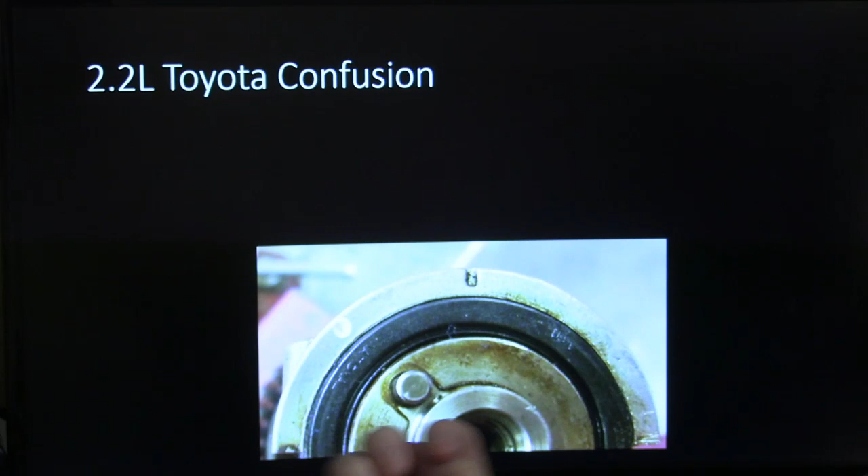One of the things I wanted to start out with, though, was something different. This was something I always thought was very interesting on these late 90s Toyota 2.2s. You see that little situation right there where you've got on this cap, there's a couple of marks. Now that one I got marked in white, and then there's this one up here. Those of you familiar with those engines are already thinking about this, and somebody may have the answer. I haven't really researched it, but you might notice this is the wrong mark to use whenever you're lining up the timing gear, the cam gear. This is the right mark. It's supposed to be here, not there.

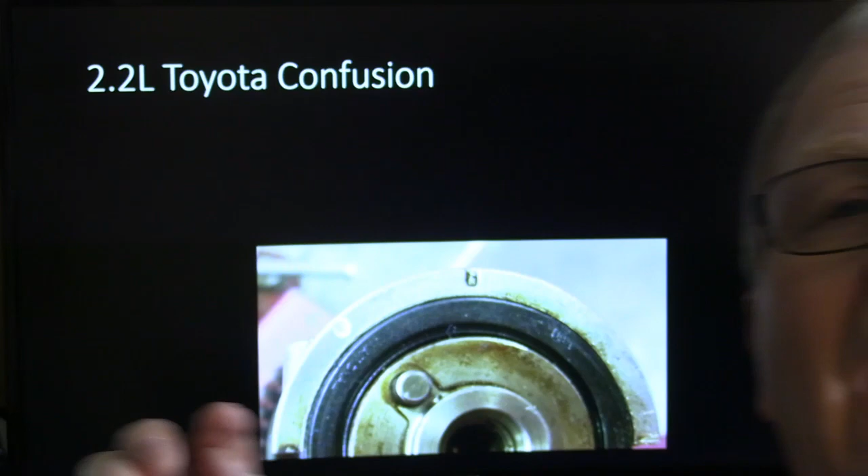Well, my question is, what's that mark doing there? Now there may be -- and this is not an interference engine, so it's not a place where you'd set the camshaft to avoid bending valves. So what I would say is, if some of you people that are really sharp on Toyotas know what this other mark is for over here, I would really like to know. Because why would it be there, where it so perfectly lines up with that hole, if you weren't supposed to use it for anything? I could be totally off base here even wondering about that.

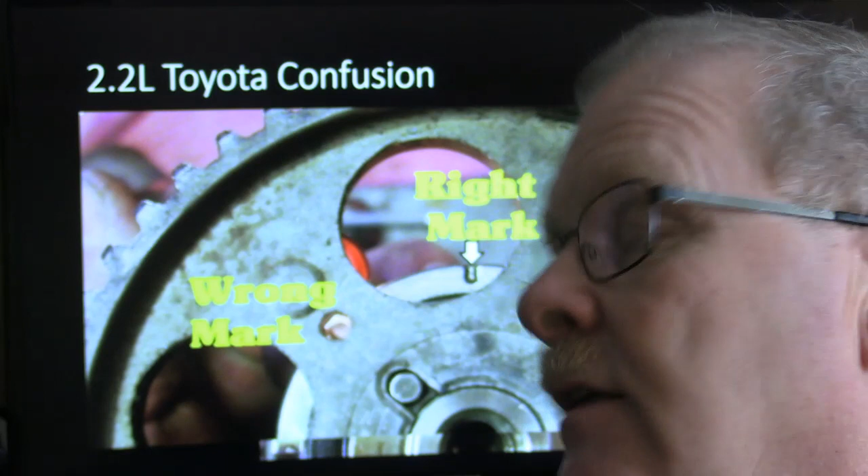But I do remember we were doing some work on an 97 Camry, and there was a Toyota mechanic that told me to line that up with that hole to set the timing, but then I realized later that this one here was the one I should have used.

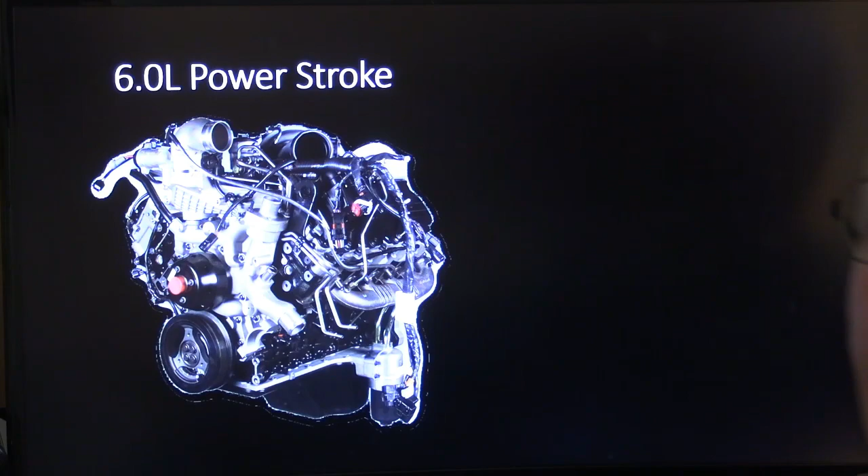Okay, now the 6-liter Power Stroke -- I had a bunch of material out there on the 7.3 Power Stroke, and a lot of you guys have some knowledge of the 7.3, which had those hydraulic electronic unit injectors, HEUI injectors, made by Caterpillar. They basically had an intensifier piston in there, and a solenoid on top with just a couple of ohms of resistance, using 115 volts. They would let high oil pressure in -- there was a control. The engine controller was able to control the oil pressure allowed to enter these injectors, and as it energized the solenoid, it would allow that oil pressure to act on top of that intensifier piston, which was 7 times bigger on top than on the bottom.

So whenever the fuel was -- let's say you had 600 pounds of pressure coming in on top, you multiply that times 7, which would be 4,200 pounds on the bottom, and the thing could go up to 3,700 pounds of high oil pressure. If you multiply that times 7, you can see the amount of fuel pressure applied to pop those injectors and allow them to spray that real fine fuel in there on the 7.3 direct injection diesels. It was a really interesting way to handle that, and it was pretty doggone reliable too.

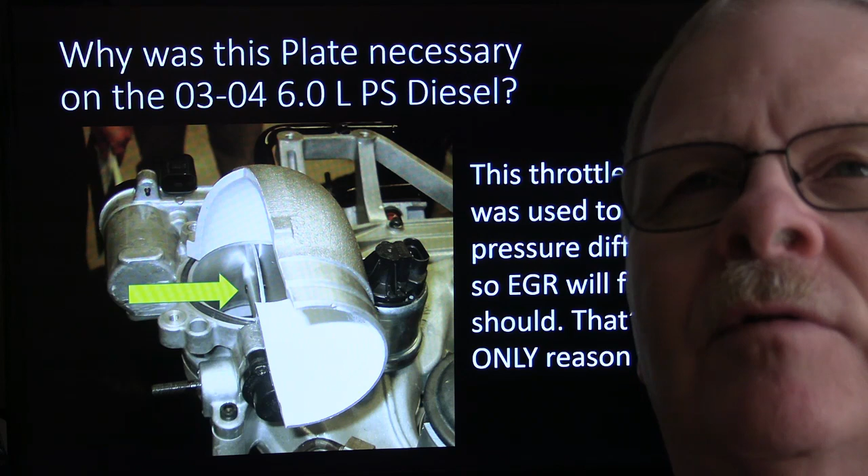Okay, so this throttle plate on the early 6-liter engines was there for the purpose of changing the pressure. So if you start to close the throttle plate a little, it enables the pressure to drop in the intake manifold and allows EGR gas -- when the EGR valve was open -- to flow, since they started being concerned about oxides of nitrogen on diesels right along in there, and they were reducing the amount that an engine would be able to legally produce as far as EPA goes.

If you close that throttle plate part of the way, you're not regulating the power of the engine with that thing. Although if it's stuck shut, it obviously would, but it didn't typically have a lot of trouble with it. That was supposed to make the EGR work. It let the EGR freely flow in there because it would lower the pressure in the manifold enough so EGR could flow. That's the reason that throttle plate was on that 6-liter.

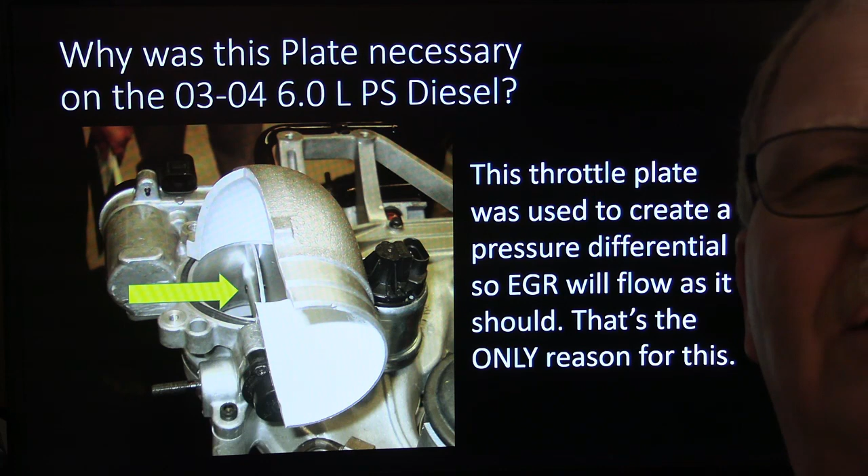I thought that was very interesting when I first saw that. This is how it was kind of wired up. In a way, it's simpler than the throttle bodies that are on the electronic throttle body vehicles now, with all the redundant potentiometers and all this kind of stuff.

This one here didn't really have the capability to let the vehicle run away. If it malfunctioned and stuck closed, it would basically choke the engine down so that it wouldn't run. So they weren't too terribly concerned about having everything so redundantly connected to this throttle body because of the nature of the job it was supposed to do.

You might notice it was very simple here. It just had a couple of wires going in there where it would drive it back and forth via these gears. Of course, there's your EGR valve right over there close by it and all that.

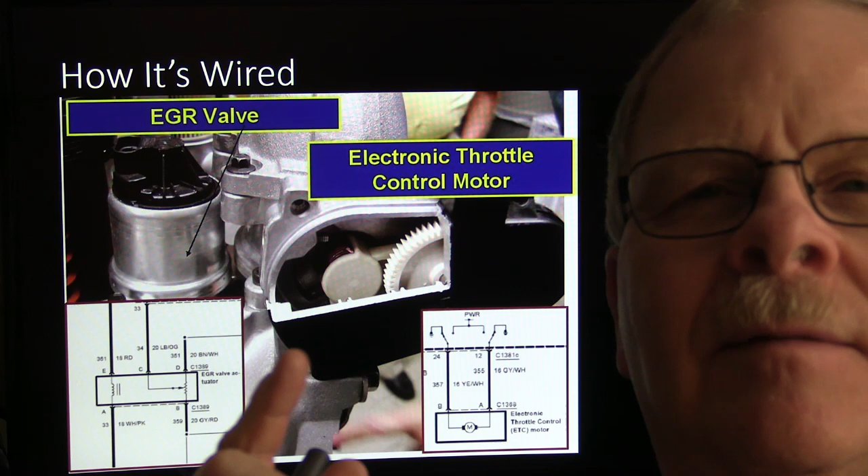But the newer throttle bodies - and I'm always speaking warnings about those - on the newer electronic throttle body vehicles, keep your hand out of the throttle body, keep your finger out, because if somebody is holding that gas open, or if you push it open with your finger and the engine's not even running, it can just destroy the throttle body on some vehicles so that you wind up having to buy a new one.

So the best thing to do is switch on the key, have somebody push the gas pedal to the floor inside the car, and it'll open the throttle plate all the way up, and you can clean it with your toothbrush if you feel like you need to, or whatever.

But if you happen to get your finger in there and your buddy takes his foot off, the spring tension is not what closes that when the key is on. It actually drives that thing closed, and it's got enough power to cut your finger off. So keep your finger out of anything you don't want cut off. It needs to be kept out of that throttle body. That's basically just a little bit of warning.

But this one here basically did a different job, so they didn't put redundant sensors all over the place on this. Even though the 7.3 had a redundant setup - it had a potentiometer and what they called an idle validation switch in there on the gas pedal.

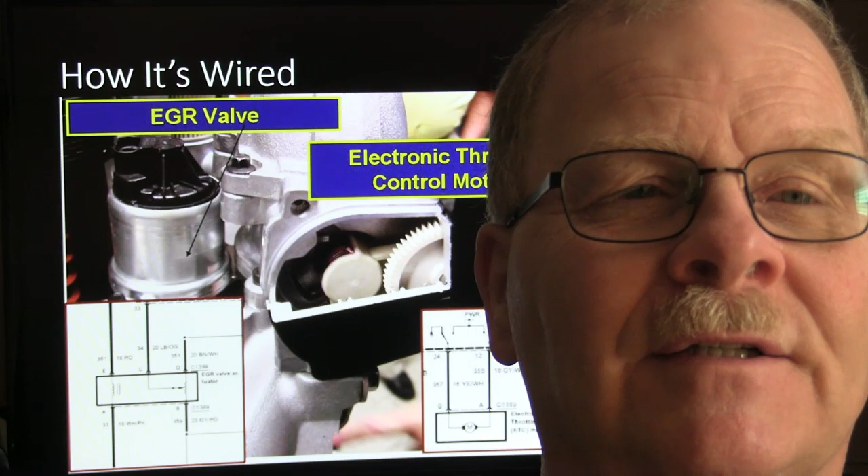Sometimes we'd have to replace those gas pedals because it was an electronic throttle, as it would change pulse width and all that kind of stuff. You could put cruise control on one of those fairly easily too, if you knew how to do it, because it was built into the engine controller on those 7.3s all the way back to like '95. Of course they came out in '94.

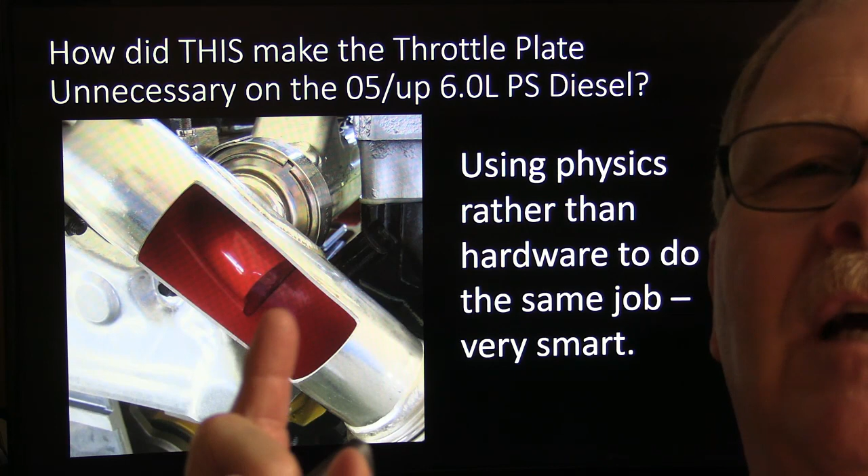But anyway, how did this make the throttle plate unnecessary on the 6-liter diesel? In '05, they used a scoop. They put a scoop in there so that when that exhaust was flowing through, it would come up to that scoop and go in there, and there was a positive pressure on that EGR, which enabled the exhaust gas recirculation to work without needing a throttle plate.

And that removed some hardware and obviously reduced the cost - the number of circuits. There were a bunch of different goodies that came about on the EGR system from them putting a scoop in there. It just made all the sense in the world when you think about it.

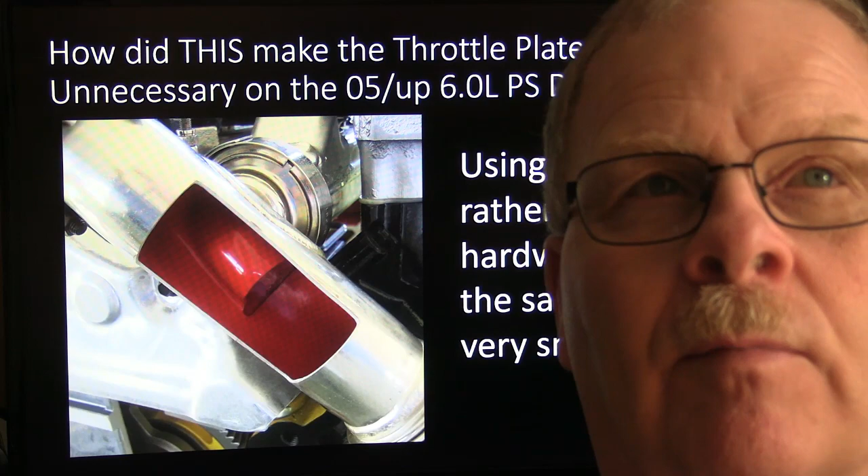Now on these cutaway engines that I'm going to be showing you little bits and pieces of: white is intake air, red is exhaust, and purple will be high fuel pressure and high oil pressure if they're on the ones that have high oil pressure, like this 6-liter driving the injectors. Pink will be fuel.

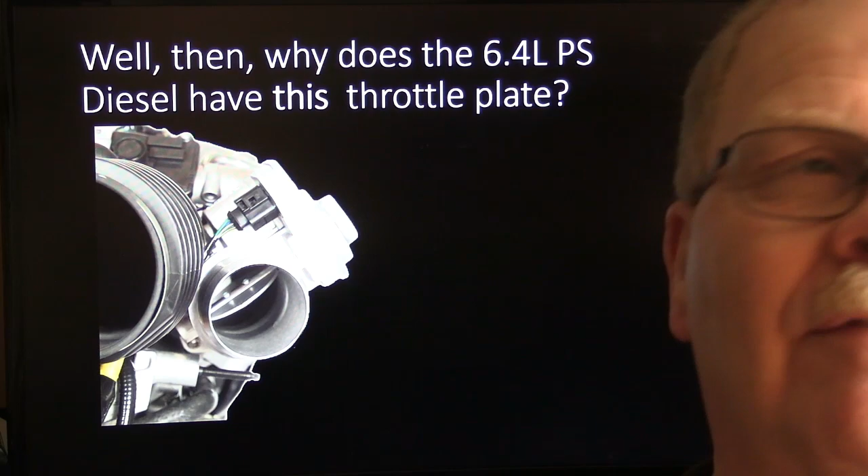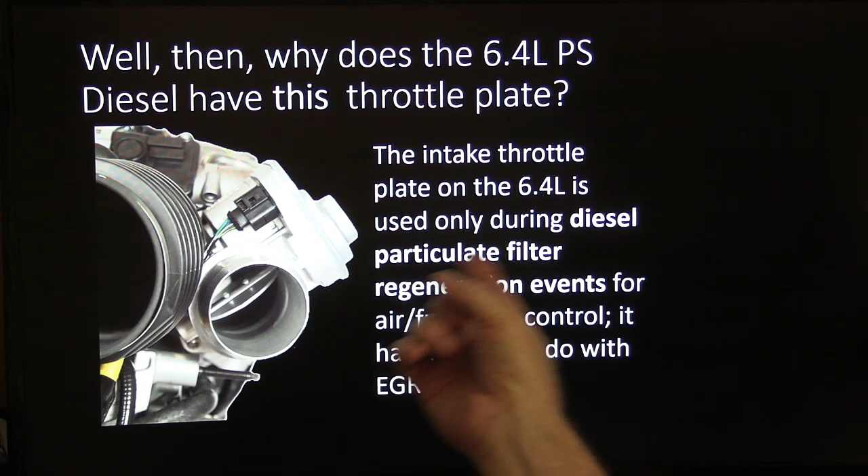All right, but why did the 6.4-liter Power Stroke diesel have this throttle plate if they had already gotten past the need for having the pressure differential for EGR? Well, the reason that one's there is to help with diesel particulate filter regeneration, which is kind of like a self-cleaning oven. If you heat that soot up hot enough, it just turns into a fine ash and goes out of there.

That particulate ash that it's handling - what it would do is put a little more fuel in there while cutting the air down, and it would make that particulate filter get super, super hot. It's like cleaning your oven. The carbon on the inside of your oven, when you do the oven cleaning, it goes up like 800 degrees or something, and it just turns everything in there in the way of carbon into ash. It's like a really nice clean oven.

Back in the day, if you ever saw an engine that was leaking water, people were just putting straight water in there because it was moving through so fast, going through one of the cylinders. When you'd pull that cylinder head off, that cylinder that was getting water would have a piston that was super, super shiny and looked brand new. So pouring in some water is what people used to do on some of them to clean the carbon off the pistons.

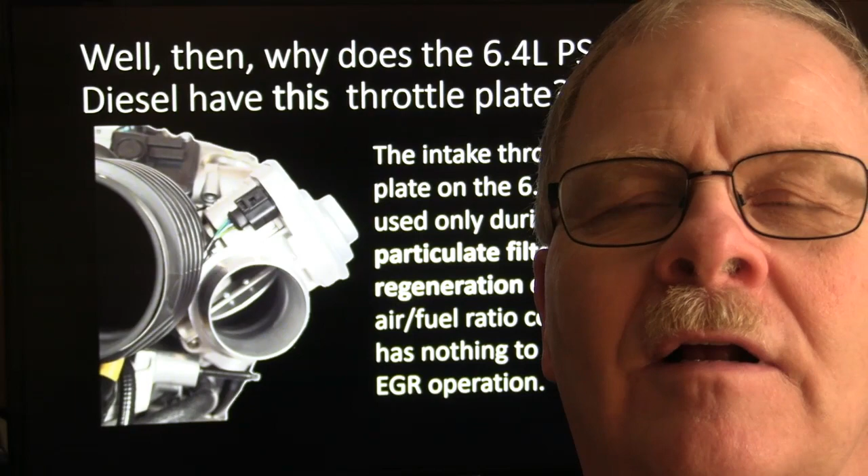Before there were catalytic converters, some of the older mechanics would pour, believe it or not, rice down there. That old dry rice, when it went through, would clean that carbon off, and it would come out the back of the tailpipe of the car looking like Rice Krispies.

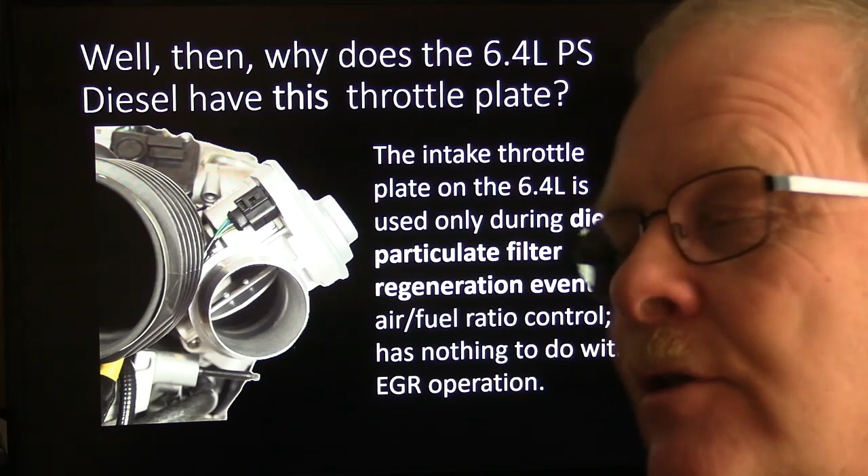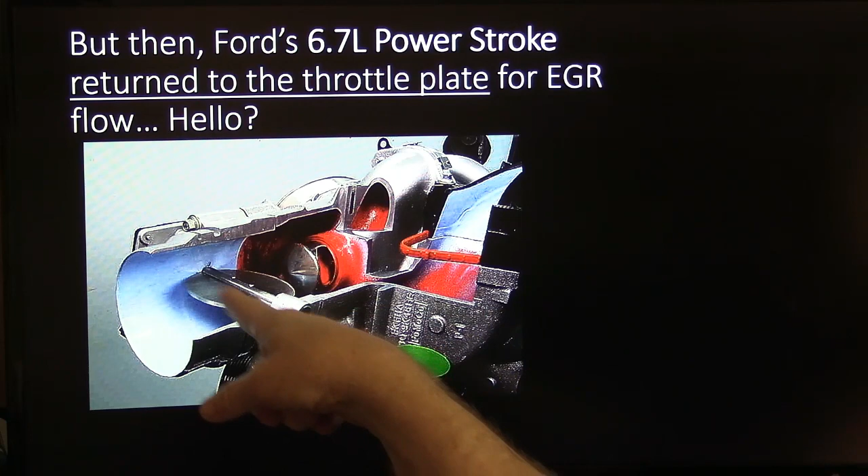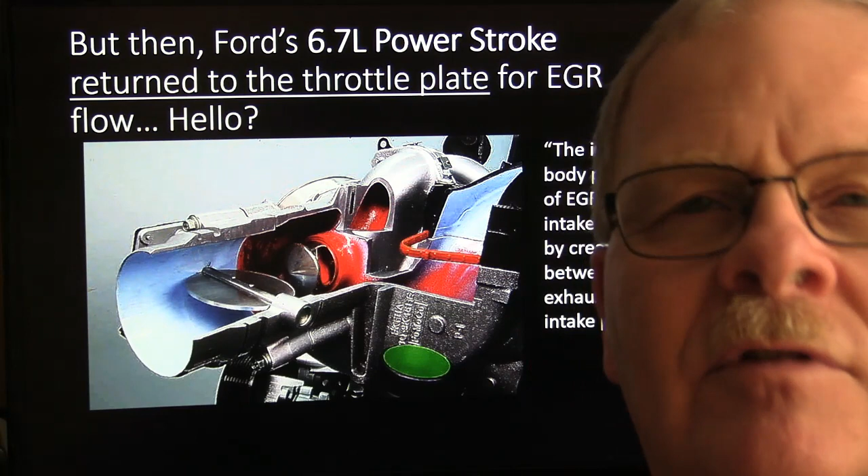Anyway, this had nothing to do with EGR operation, but on the 6.7 liter diesel made by Ford, they returned to the throttle plate to facilitate EGR flow, which is what was going on back on the 6 liter created by Navistar. This is a Ford engine, the other one was International, Navistar, International. So that was what this one here was for.

I thought that was very interesting that they went away from the throttle plate, because they figured out a way to do it without it, with no moving parts, just using physics. Then they had to put a throttle plate on for catalyst reduction. I expect, if the truth was known - the literature I had didn't talk about it - they probably used this for catalyst reduction too, by cutting some of the air off the same way they did on the 6.4. It didn't mention that in the documentation I had that I was using to build this.

This was a 6 liter Power Stroke diesel, the '03 model, and this pipe has got a different configuration on the later model - it's more flat than that. But anyhow, I took this photo at the assembly plant.

This is the high pressure oil pump. It doesn't require any kind of timing or anything because it's just jacking up the oil pressure that's going to be used for the injectors. You also might notice that these gears right here are in the back of the engine rather than the front, and it was pretty ingenious the way they had it designed. This front chamber up here had the oil cooler in it, and then back here there was this little chamber that had the oil pump. So that's kind of the way that went.

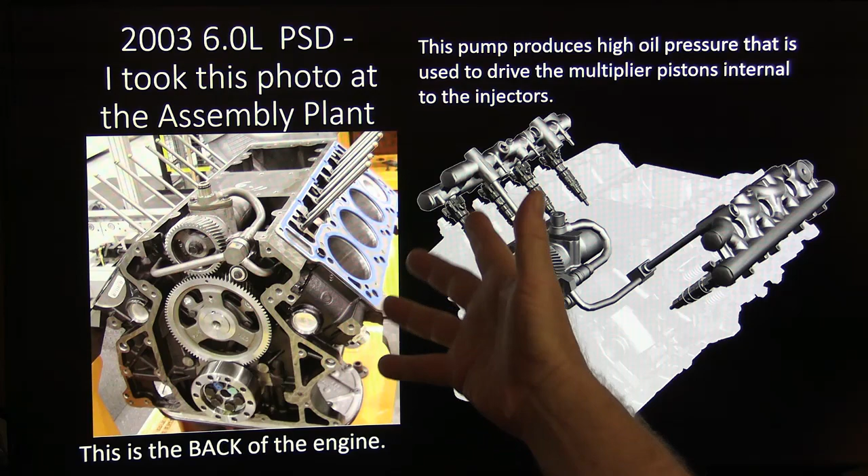This pumped that oil up into that oil rail, and that oil rail was kind of a common rail, but it was for the oil. Then the fuel was fed in through the cylinder head of the injectors. We're going to look at that a little bit closer here in a minute, how the injectors work.

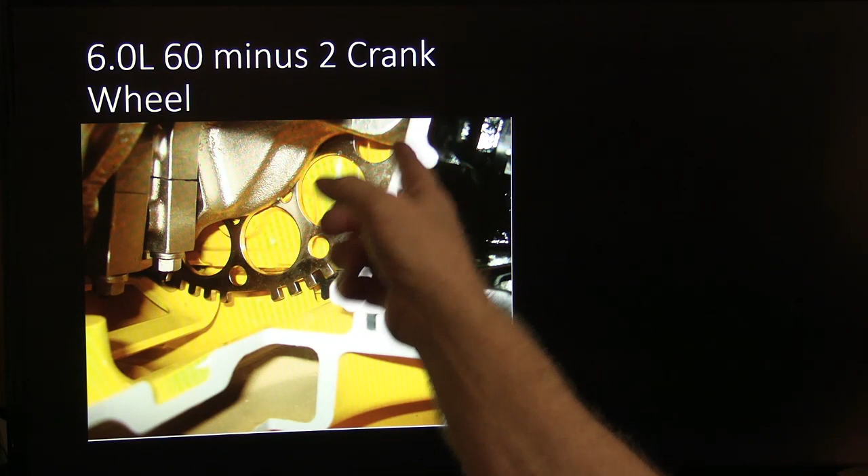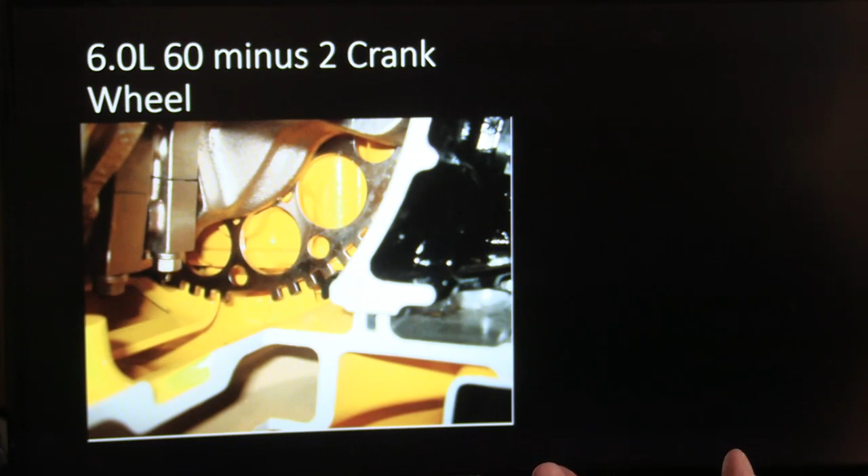There was a 60-2 tooth crank wheel on this 6 liter, with 2 missing teeth. We're used to having a 36-1 on the gas burners; this was a 60-2. Interestingly enough, the Duramax engines use a 60-3, which I think is pretty interesting. That's how that worked around, and this is a crank sensor. Now you might remember on the 7.3 there was no crank sensor, there was only a cam sensor.

Alright, this is a 6.4 liter Power Stroke, and this is a 6.7 liter Power Stroke. Now that one there is not a cutaway engine, but you can kind of see what's going on there - just a neat little graphic that I put up there so you can see both those engines.

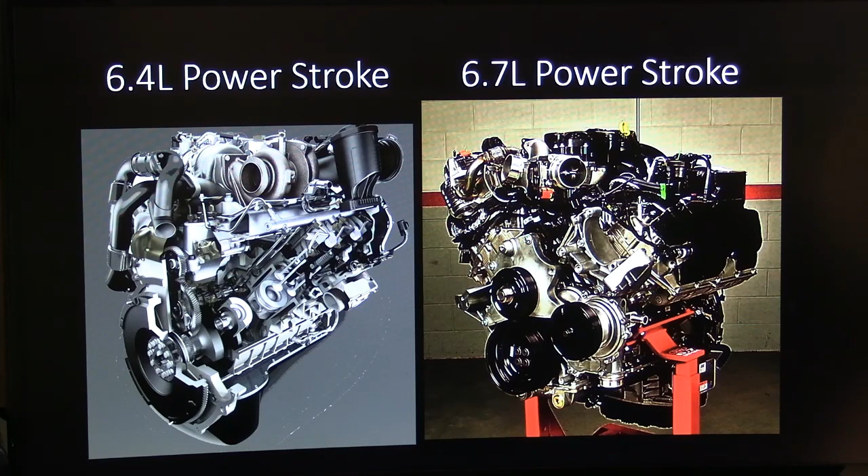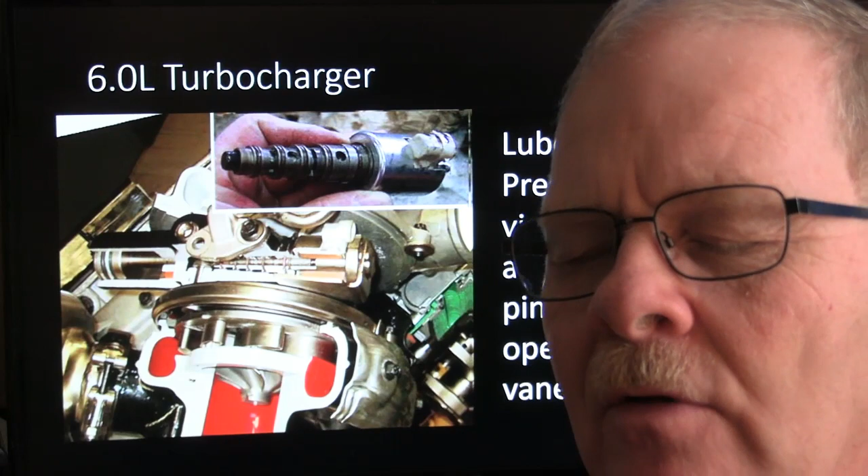Alright, now the 6 liter turbocharger was variable geometry, and what that meant was it moved these vanes, because whenever the engine was cold, it didn't need a large turbocharger - they just needed a small one. They also wanted more back pressure for heating up the cabin. You might remember on the 7.3, the turbocharger back there had a little valve that closed up that choked the exhaust gas down some, so that they wanted to warm the cabin up faster.

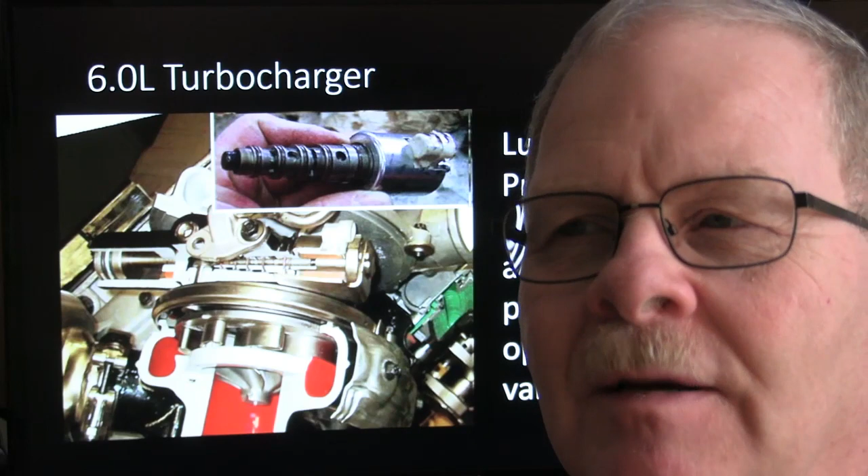That seemed to be a big deal that they were concerned about. What they used here was a little rack and pinion assembly, and this was driven by oil pressure.

Now on these other ones, I'm also going to tell you that pressurized lube oil is pictured in orange whenever you're looking at these cutaways. There's exhaust over on this other side. This right here is where the exhaust would spin that turbine, and on the other side, that impeller. So basically this right here would go back and forth, and it moved a little shaft that was hooked in a hole. I'll show you a little bit closer how that works in a minute. There was a rack and pinion setup operating this thing, and I had that one in my hand right there that I was holding.

That solenoid is mounted right there on the turbocharger, and so the variable geometry turbocharger worked really good. Interestingly enough, Cummins, and also this turbocharger here, the Duramax, is exactly the same principle as this.

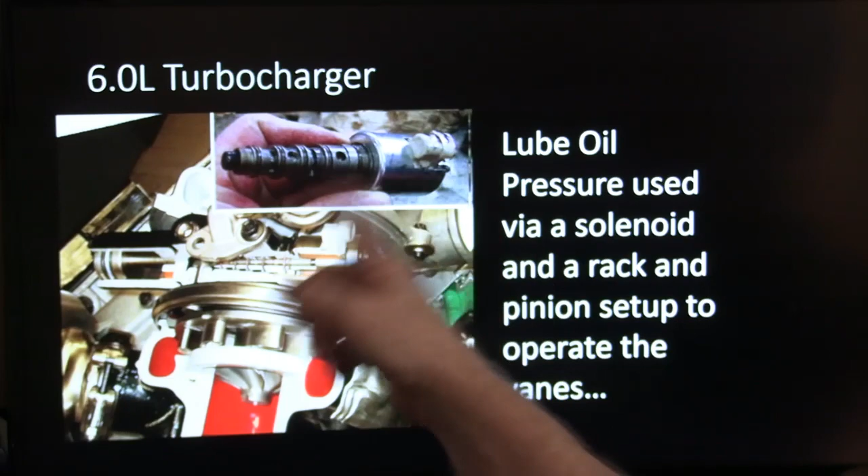Now, as I remember, there are some parts of the Duramax turbocharger that are stainless steel, you know, in these vintage vehicles and all that. But it's exactly the same turbocharger, and this turbocharger, as I remember, was made by Garrett. But anyhow, that's an interesting little setup right there.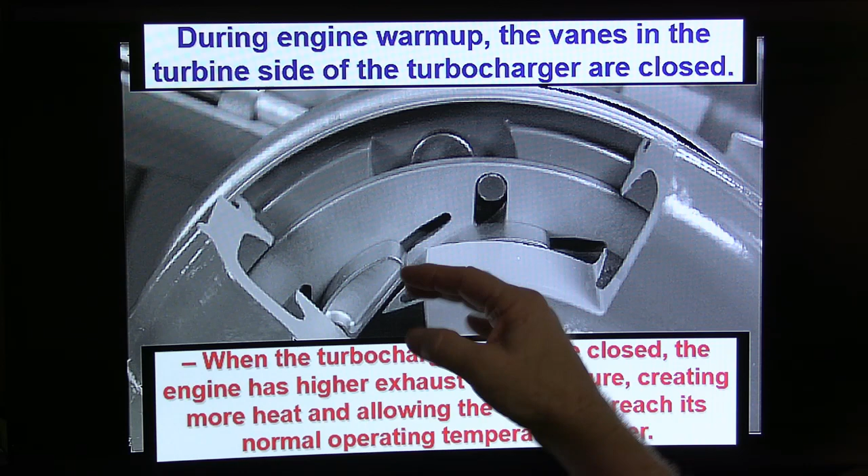Now, what it did, you might notice, is this little round piece here, as it turned back and forth, it's got a slotted hole. It would basically move to open and close those vanes. So when the turbocharger vanes are closed, the engine's got higher exhaust back pressure, which creates more heat and allows the engine to reach its normal operating temperature faster. And you know, this is on the exhaust side of this thing.

Furthermore, when that exhaust is forced to go through those little small passages, it spins the wheel faster, and it makes this thing act like a small turbocharger.

I remember one time I worked on a Ford Escort. It was probably the only turbocharged Escort I had ever seen in my whole career of working on those. It was a brand new car, and whenever the boost kicked in, there would be a little green light on the dash, it'd come on. It wouldn't have a gauge for pounds, it would just boost. And when I opened the hood and was looking, this was factory now, it wasn't somebody put on there. The little turbocharger was a little bitty thing, it didn't look a little bigger than a pancake. I thought, oh, that's a joke. I wonder what they put that on there for.

Well, I had to do some kind of work on the car, I don't remember what it was, but when I went out to drive it, I just took off on it the way I ordinarily would on an Escort, going into traffic out there on that heavy traffic. When that turbocharger kicked in, that son of a gun broke the tires loose, and torque steering there about jerked me into the ditch. It scared the daylights out of me. That thing would just scoot when that little green light popped on.

We started getting boost. Now this right here is a 6.4 liter turbocharger. You might notice this one is going through, this is actually pumping air through that one, as I remember. I forget that, I've slept since the last time I drew a diagram of that. But I actually was there at the rally, and I did this so you can see what those vanes are doing. See, these vanes are slightly different on the newer one than that.

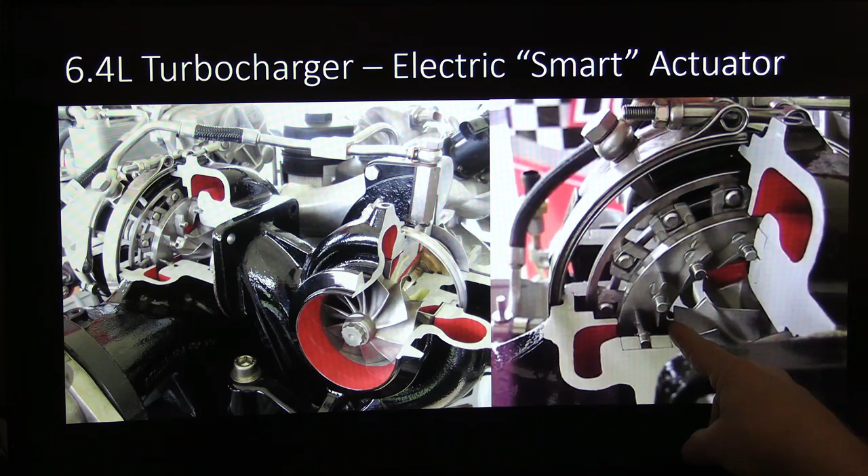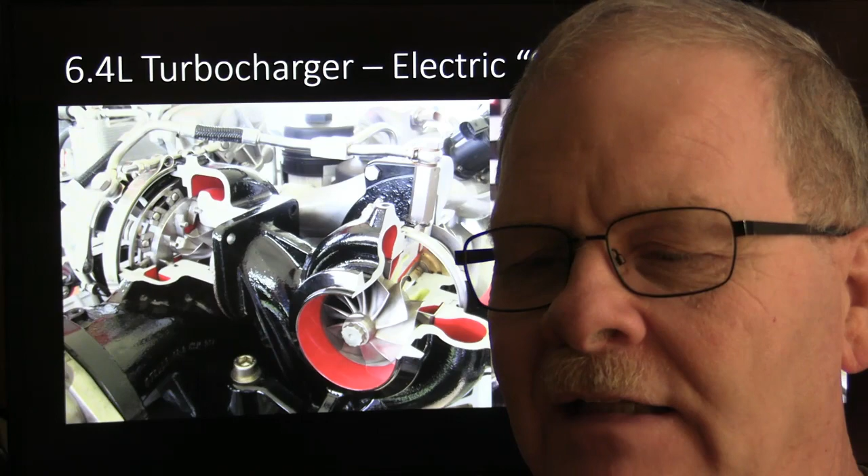And this assembly here is basically operated on the CAN bus. But this is a smart assembly. Whenever the engine controller... most of the time, because they've got the circuits in the engine controller so crowded they don't have room to put transmission control circuits in there, they don't call it a PCM anymore, they call it an ECM, because all it does is control the engine. And they'll have a separate controller for the transmission on just about all these vehicles nowadays.

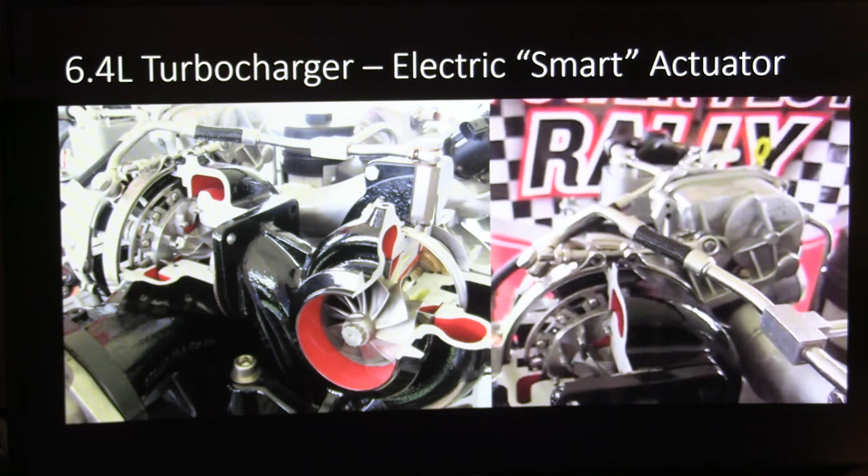So we went from General Motors calling their engine controller an ECM to the term PCM, which was J1930 regulation terminology, powertrain control module, because it was controlling the engine and the transmission. And we went from there back to ECM because things got so complicated they didn't have room in the engine controller to stuff all those circuits and logic chips in there to control everything. But this thing right here has basically got a cooling line that's hooked to it with a separate coolant supply and pump and all that.

That's basically the cooler over there. You can barely see it, but this thing right here.

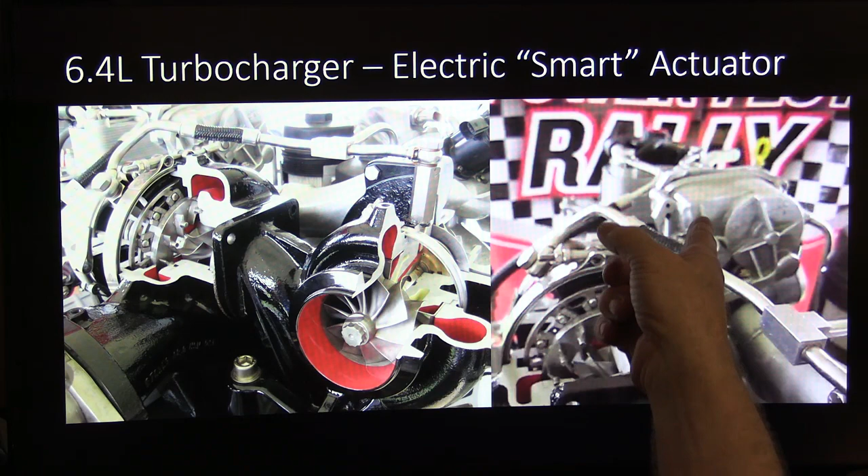Let's say that this box and that one are the same thing—I guess they're two different things, obviously. If this received a command from the engine controller to do something with the turbo vanes, and this thing was running too hot, because it was really close to this, then it would refuse to do anything with the turbocharger until the engine controller turned on the pump to pump some coolant through there to cool it down. So it could actually refuse a request of the engine controller under certain conditions, because it's a CAN bus. In the early days, the only thing CAN bus did was communicate between this turbocharger controller, which just had a piece of linkage that moved those vanes, and the engine controller. So it could refuse a command, that's the point.

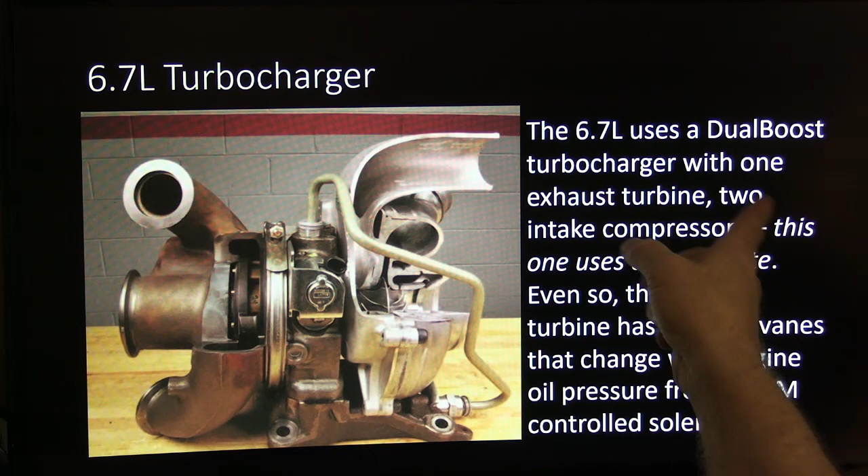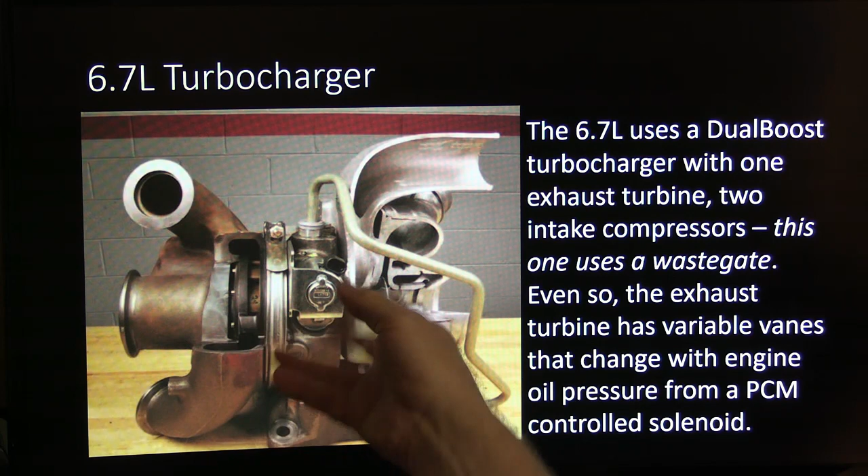The 6.7 liter turbocharger uses a dual boost turbocharger with one exhaust turbine and two intake compressors, and this one uses a wastegate. Even so, the exhaust turbine has variable vanes that change with engine oil pressure from a PCM-controlled solenoid. So this one here is sort of like a dual charger, which is a pretty interesting setup if you think about it. You can see those vanes right over there.

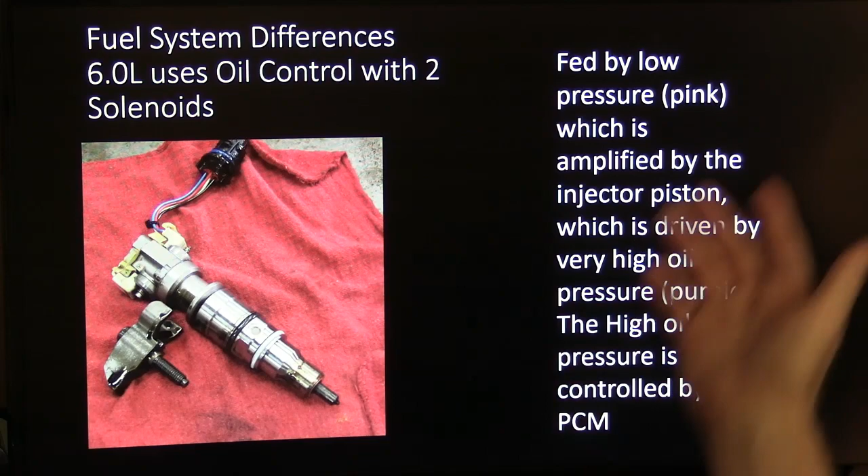Your opening coil and your closing coil move that spool valve back and forth so it can determine how much pressure goes down to the top of this intensifier piston to drive down here. Whenever the fuel pressure gets enough, it will cause that little needle to lift off its seat against that spring, and it takes many thousands of pounds for it to do that. But it's multiplying this by a factor of 7—whatever pressure's coming in here gets multiplied by a factor of 7 down here.

It takes 48 volts at 20 amps to operate the opening and closing coils on these 6-liter injectors. I also thought it was interesting that the earlier Power Strokes took 115 volts to operate their HEUI injectors. These injectors, incidentally, were made by Siemens, a German company. They got away from the Caterpillar injectors, and it kind of ticked Caterpillar off a little bit.

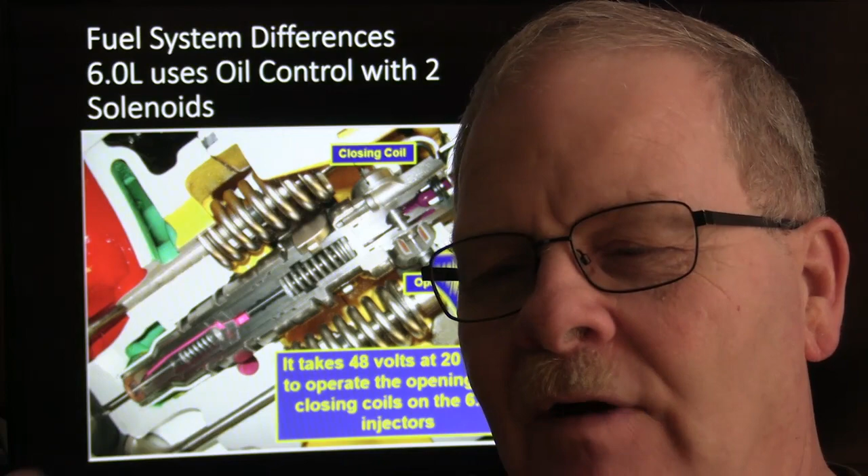Oh, by the way, to start with they had this thing where it would pulse the fuel in there, jitter it back and forth to pulse the fuel for a smoother idle and better fuel economy. But they wound up with some idle surging going on because of that, and there were enough customers complaining about it—customers are good at doing this to themselves—that Ford sent out a reflash for the engine controller to do away with this bouncing back and forth and putting the fuel in there with a pulsation, if you want to call it that. I'm just giving you this in the way that I describe it.

Anyway, I do know for a fact that after they reflashed these, the fuel economy on these 6-liters went from like 18, 19 miles per gallon down to 13. It was not a good idea, and you couldn't go back the other way. If you were grousing about your fuel economy, that was on you. Right?

After they did that reflash, if you refused it and put up a bit of a rolling idle, you were better off on fuel economy. It's almost like they were smacking you down for it. I don't think they did that on purpose, but the fact that they wouldn't go backwards with that was pretty interesting to me.

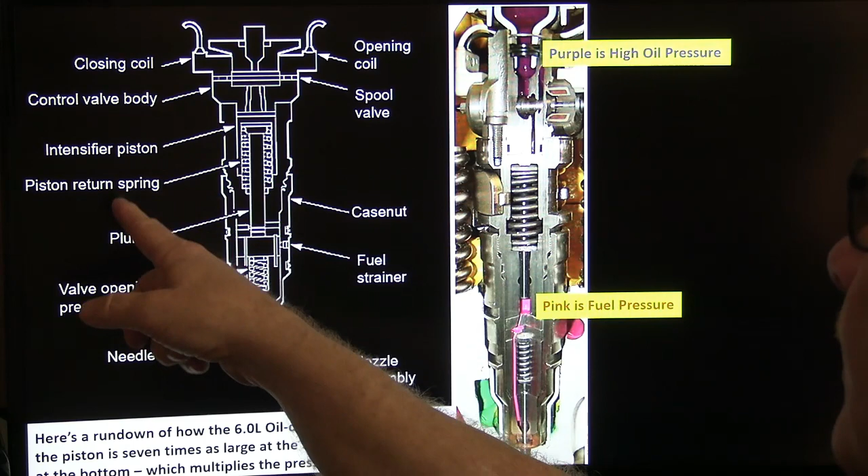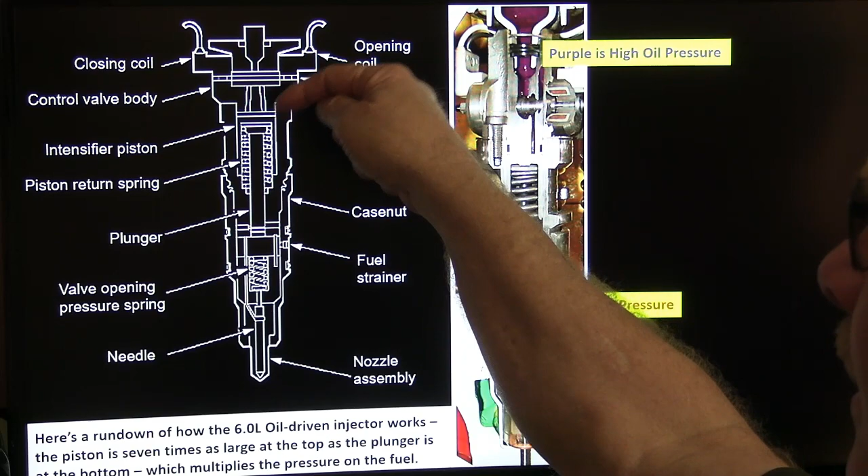Now this is a closer look at that - a rundown. You've got a piston return spring, valve opening pressure spring, where it popped the injector, and a fuel strainer where the fuel went in from the side through the head. Piston return spring, intensifier piston - you can see that's shaped like a nail, bigger on top than on the bottom. If you know anything about Pascal's law, you'll know that when you put pressure in here, it's going to multiply by a factor of 7 based on the difference between this and that.

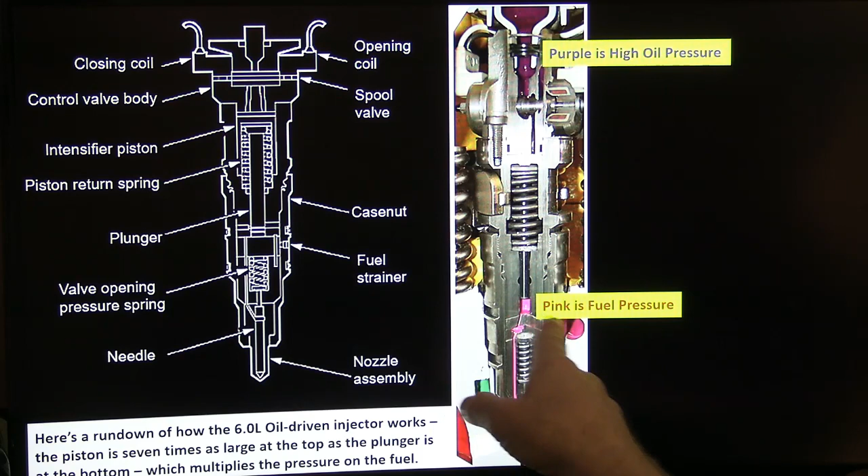And there's your spool valve opening coil - that's pink, fuel pressure. See how it's coming in through the head, through that little passage there, into the injector. And the oil is fed in through that big oil rail that's on the top. So there you go on that.

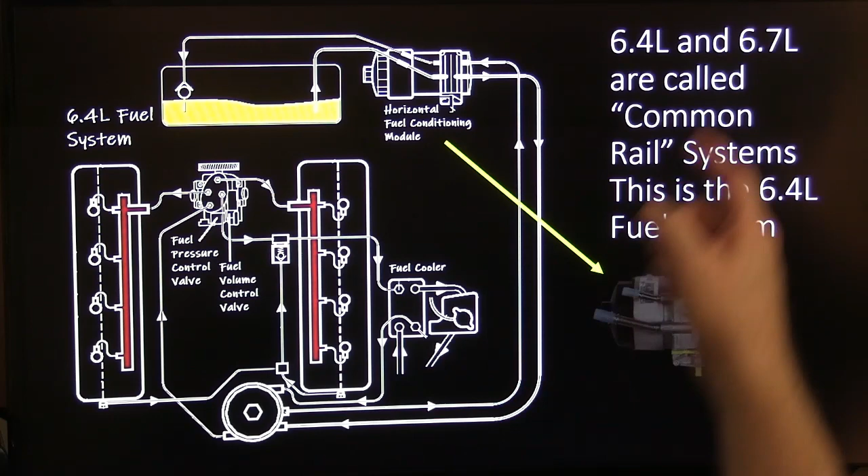Now, the 6.4 and the 6.7 are called common rail systems, which is really kind of a misnomer because all multi-point fuel injection systems are basically common rail, since the same pressure rail feeds all the injectors. Gasoline direct injection is sometimes called common rail too, but the main difference is GDI puts fuel directly into the cylinder instead of behind the valve. Anytime you've got a bunch of injectors fed out of one rail, that's a common rail system regardless of how you talk about it.

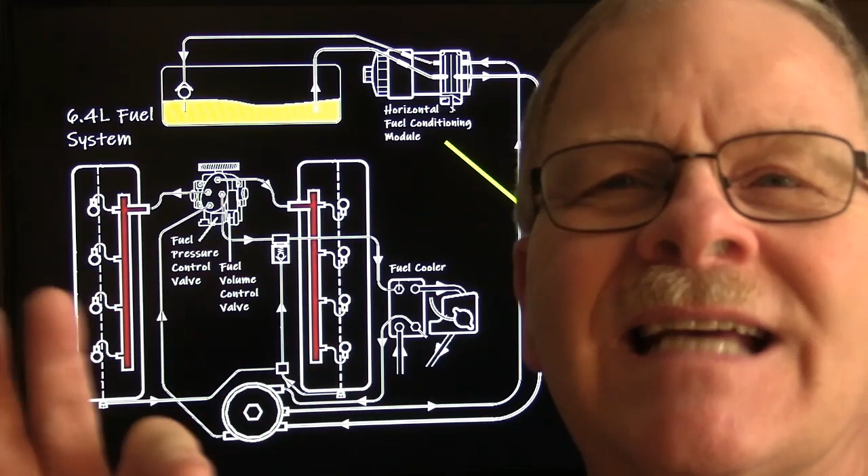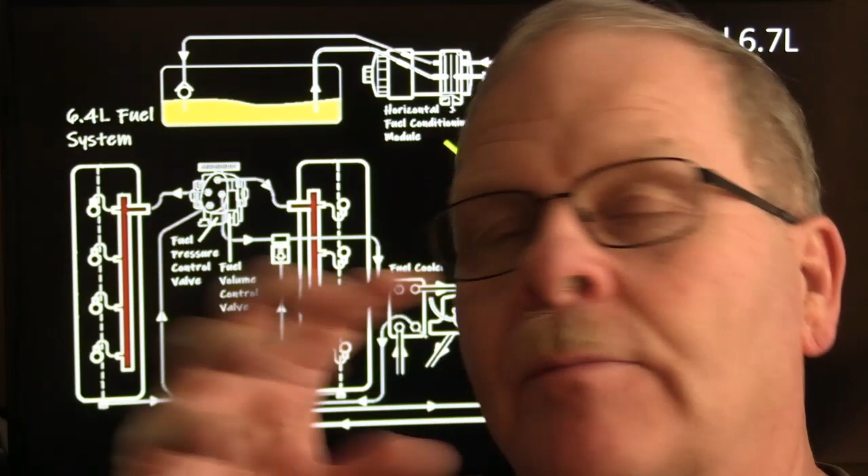The reason they call diesels common rail, and it became an issue, was their injector pumps on the older diesels had a separate high pressure line going to each injector. That line had to be a certain length - it couldn't have more than a certain radius of bend in each line. So all the lines had to be exactly the same length on the ones with the injector pump that snaked separate lines into each injector. It would send pulses of pressure to the injectors that would pop the injector - that's how you gave your injector timing, because each injector had its own separate little line going to it. They didn't call that common rail.

But common rail injection basically has a rail feeding all these injectors with the same amount of pressure all the time, and they're electrically operated. It's the same way on both sides.

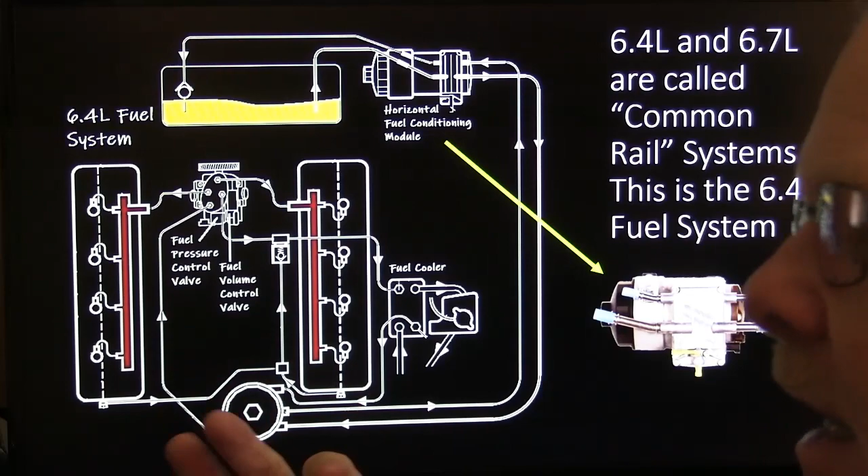This right here would be the pump feeding that. Dodge and Ford typically like to feed the high pressure fuel pump - now this is fuel, not oil. The high pressure oil on the HEUI system and on the 6-liter was what gave the injectors their punch. This pressure right here can be many thousands of pounds. I remember the numbers on the Duramax - if you disconnected the little pressure control solenoid, that thing would go to 23,550 pounds of pressure when it defaulted to high pressure. The Fords tended to default to low pressure, at least on the Power Strokes I worked on, the old 7.3s.

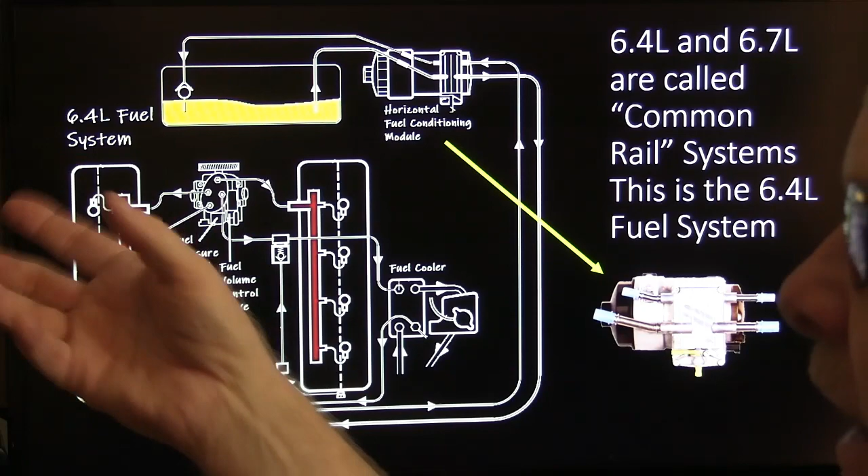This one here's your fuel cooler. This is the one I showed you the picture of that had the dual turbocharger a while ago, with the little animation of the vanes going. So you've got a filter here - a horizontal fuel conditioning module was an interesting critter.

It's under there on the frame. It had a filter and a pump in it and a little water and fuel sensor down there. It looks like that in the real world, but there's also a little drain on it, a little yellow handle where you can flip this thing around and drain the fuel out if you decide you want to. And of course there's a little check ball right there, and so on and so forth.

All right, so that is a 6.4. This is a 6.7. They're called common rail systems, both of them are. And this is a 6.7. See the difference in that one and that one? All right, so look where that rail is right there, okay?

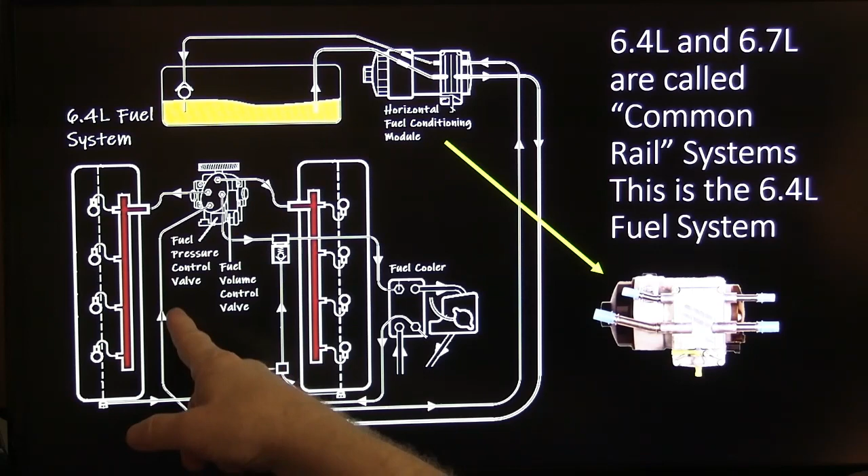All right, now look at this one here. This one right here, you got this rail. There's a fuel pressure control valve, okay? And this one here, there's a fuel volume control valve and a fuel pressure control valve. It's got one of each, right?

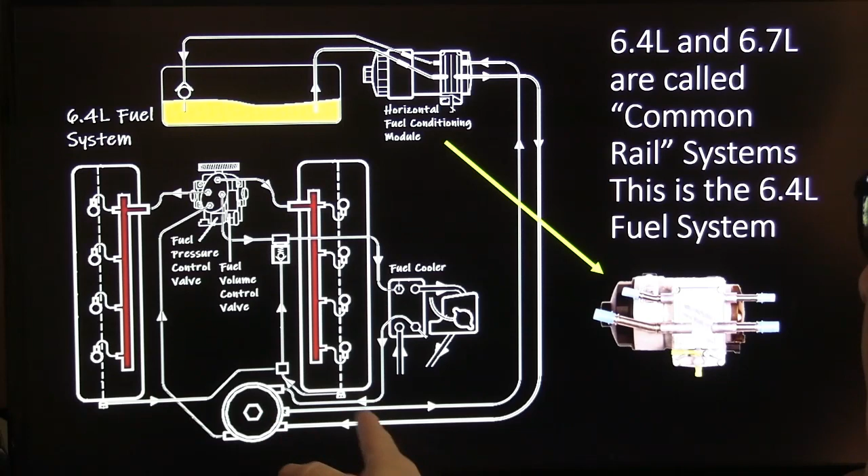Okay, now on your GDI engines, they basically have a sensor in the fuel rail that's telling it what the fuel rail pressure is as a feedback. This one here has got that too. Well, I mean the other one does. Okay, so let me go here, excuse me.

Alright, so right there you got a fuel volume control valve on here. You got a fuel rail pressure sensor on this rail. And you got a fuel pressure control valve, which can actually be used to control the pressure. This one determines how much fuel is going in there out of this high pressure pump. This actually is a fine tuning pressure deal.

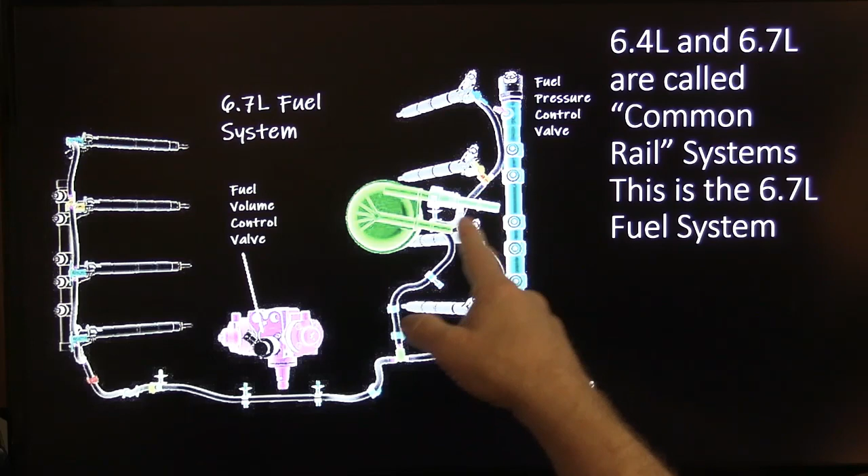And so there's a little connection right here that they don't really show, and it feeds all of the injectors. So I guess you would call that, this is the common rail, and it's got lines that just basically are feeding it the same amount of pressure to every injector and all that. Of course, there's also a return that is used for this, is the way I understand it.

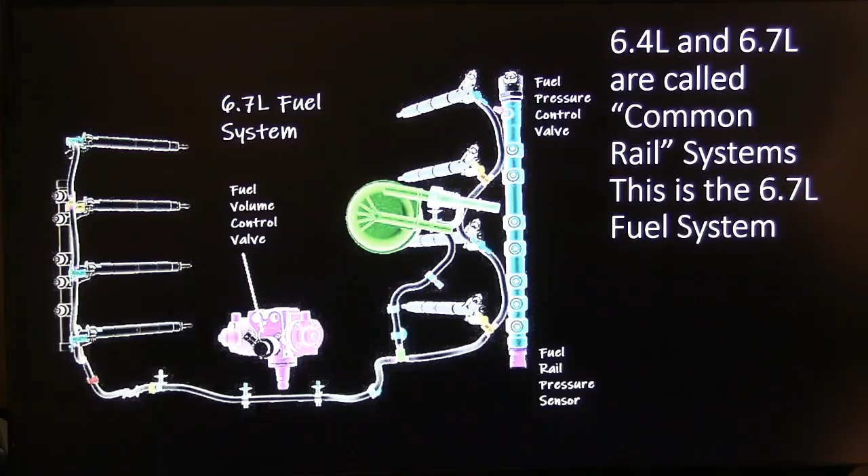Anyway, the 6.4 and the 6.7 injectors use piezo, and whenever this piezo actuator is not energized, it is about 1/1000th of an inch shorter than it is when it's energized. And that is just a tiny little bit, but it's enough, because whenever it energizes it, it basically stops up a vent and forces that fuel pressure to go up high and pop the injector and all that. So basically the fuel is bypassing through this little thing, this little stack of piezo crystals here is what makes that work.

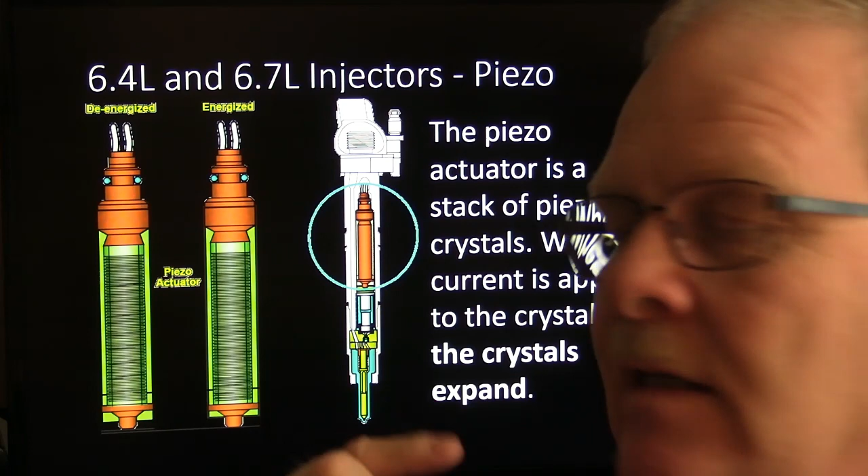Now, Duramax injectors, the earlier ones, didn't use piezo the way I understood it. They were just electromagnetic, but I could have been wrong. Typically, this kind of injector requires a heck of a lot more volts. Like usually, if I'm not mistaken, it's like 125 volts or something like that, maybe more than that on these. I was looking for voltage numbers on those, and I wanted something good and solid to give you, but I do know they use higher voltage than conventional injectors.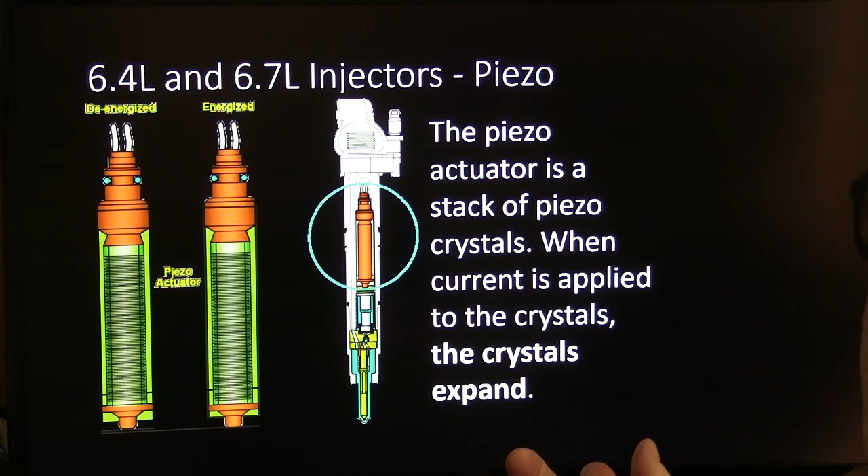And when the current's applied to the crystals, they expand, and when the PCM-supplied current is removed, they contract. So when they contract, you're basically not injecting fuel. When they create voltage, though, and current, because current flow reverses. You know how piezo elements do that. They actually create voltage with pressure.

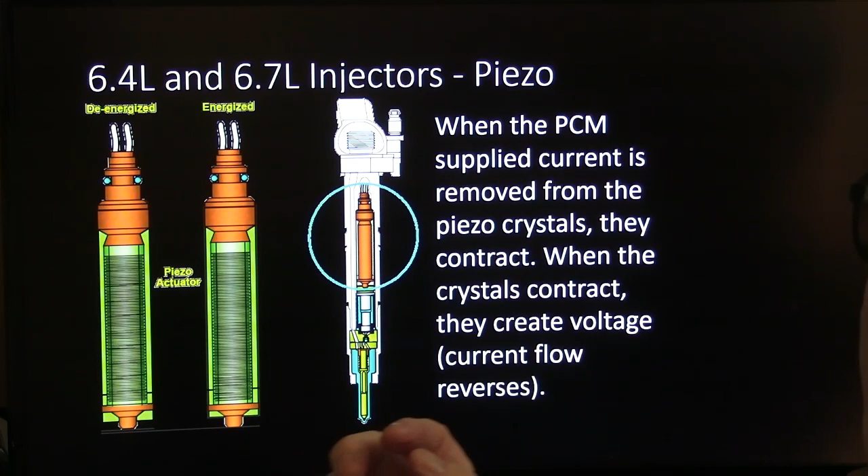Matter of fact, the heart of these little pulse sensors that you have is a piezo. You know the little pickup that you can get. And I'm going to show you that one of these days for a guitar that you put in there, and it basically makes your electric guitar put out sound and all that. You can actually put one of those in a closed chamber like a bottle or something and hook wires up to it to your scope, and you can make yourself a pulse sensor for almost no money. But anyway,

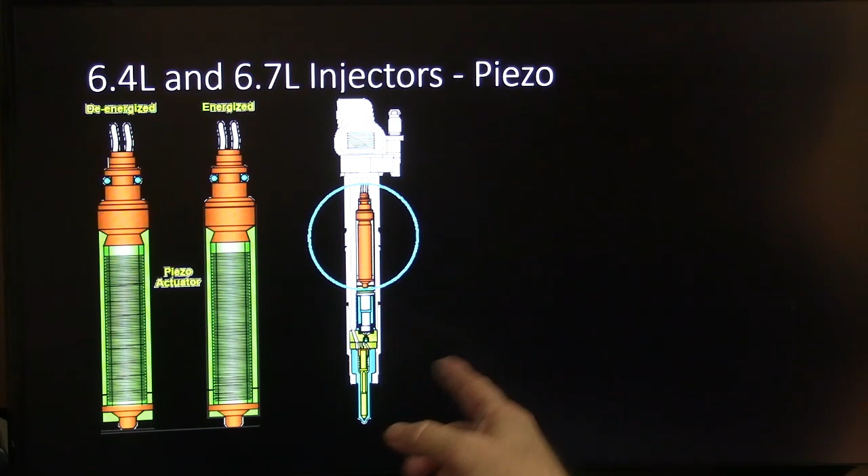This PCM supplies current to the piezo stack. When it's de-energized, it's removed. Alright, now I'm going the wrong way, sorry about that, got the finger on the wrong button.

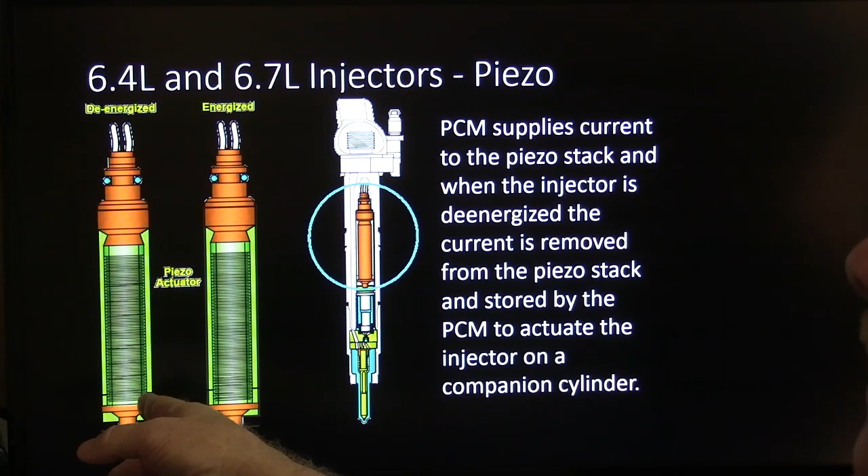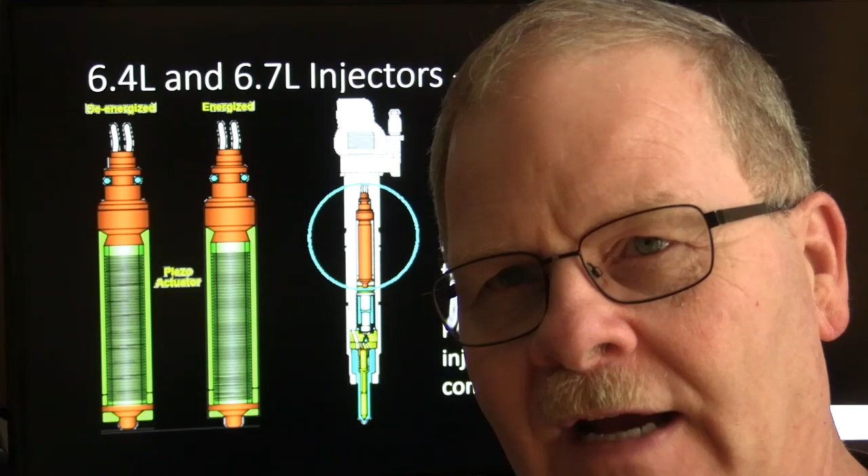Stored by the PCM, this is interesting to me, it's stored by the PCM to actuate the injector on a companion cylinder. So basically when this one de-energizes, it's kind of like whenever your points, you remember how your points, whenever they would close, they would charge up that capacitor, which was the condenser in the distributor, and when the points opened, it would basically charge the capacitor because the spark that was trying to jump between the points would go into the capacitor. And then whenever they closed, that capacitor would discharge, and it would send all that voltage back in there to saturate the coil a little faster.

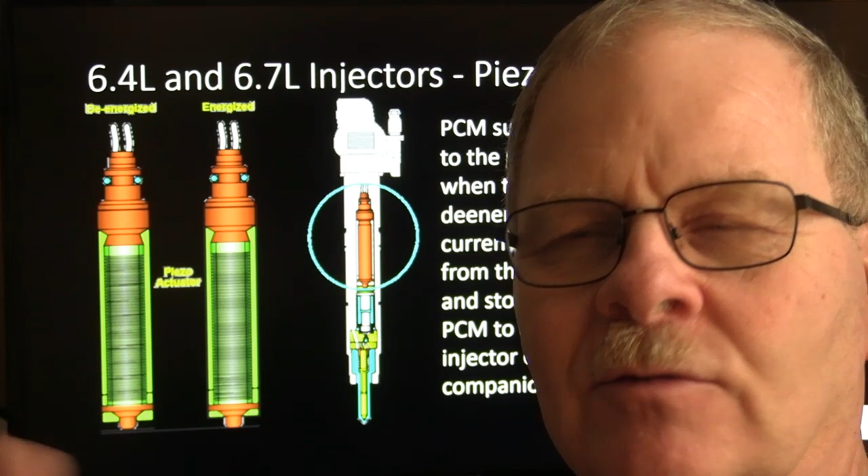That's one of the reasons if the condenser was bad, the spark wasn't as strong. But anyway, they basically used that.

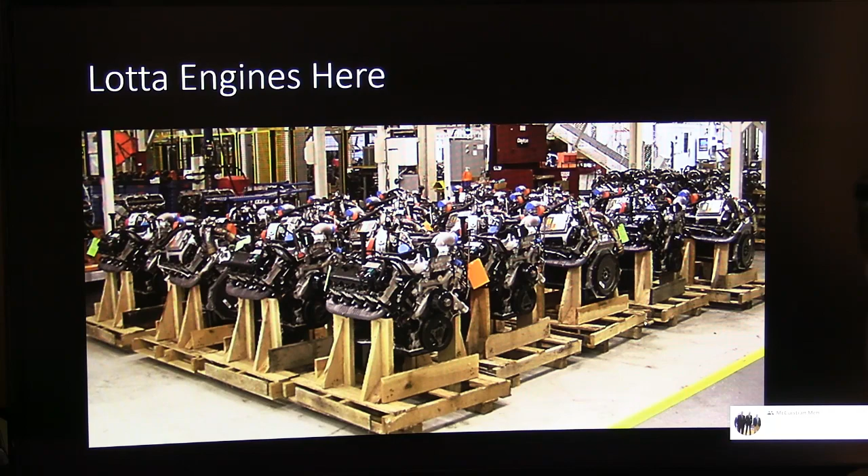This is a whole bunch of engines. I took that picture at the plant. The first year I went there, they actually let us walk around and take pictures, and it was just really a cool thing.

They were so friendly at that Power Stroke Navistar engine plant. I went one time up there as a journalist, and I was the only journalist that they really invited. I was totally amazed at that, and this guy showed me around the plant.

I didn't go with all of the other Power Stroke owners that were touring the plant. They said, you're going with this guy here, so I went with him all over the plant.

He told me anything I wanted to know. He showed me a clean room where they would take the 6.4s and put the heads in there, and pressure up the fuel system with many thousands of pounds of pressure.

They had dye in the fuel they were pressuring up with, and black lights in there and cameras to see if there were any leaks anywhere whatsoever.

That room had sensors so that if there were dust particles more than a certain concentration or size, they would shut the room down and clear the air out with special filters. I thought that was very interesting.

The room wasn't much bigger than this room I'm sitting in, but he pointed that out to me and explained it in detail.

Then we went over to this big Boehringer crank grinding machine, where there was a big old guy with a hard hat and safety glasses, a computer screen up there, and he was grinding a crankshaft. You could see it through the windows in these big closed metal doors.

Today, we are done talking about the diesels. And if you like this stuff and want a little bit more about the diesels, I expect I can probably give you some more in a later video.